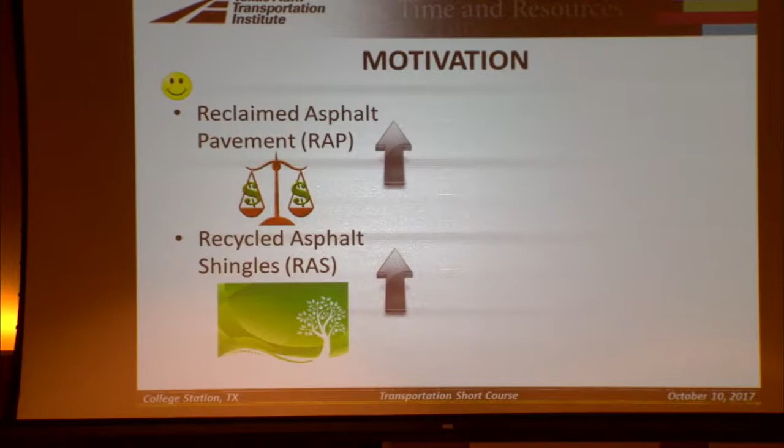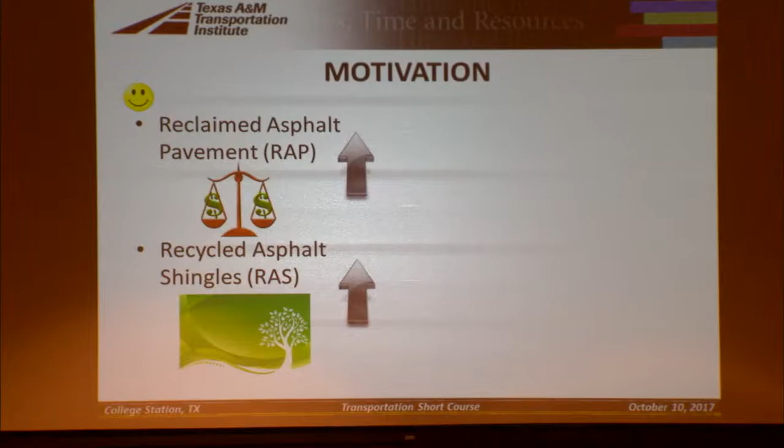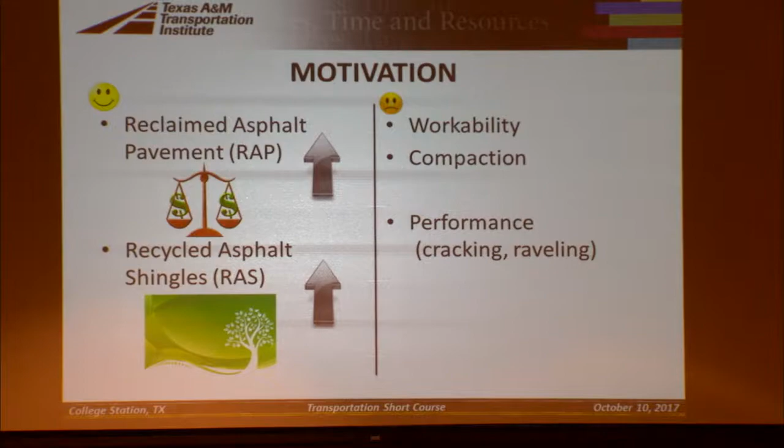This topic is timely because a lot of agencies are pushing to increase the amount of reclaimed asphalt pavement, or RAP, and recycled asphalt shingles, or RAS, in mixtures. That's good for economic reasons, since contractors save money by not needing as much virgin binder, and for environmental reasons, since you don't need to mine as much raw material.

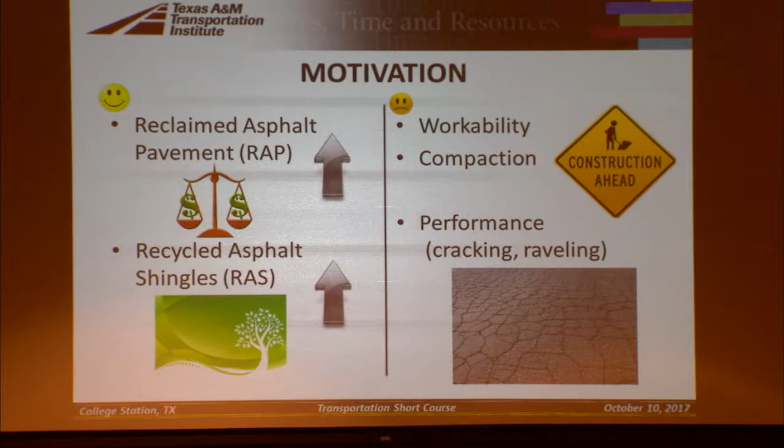However, there are still concerns with using high amounts of recycled asphalt pavement or shingles in mixtures, because sometimes there are problems during construction in terms of workability and compaction. Also, there's a general concern that these mixtures using aged materials will be more prone to cracking or other issues such as raveling.

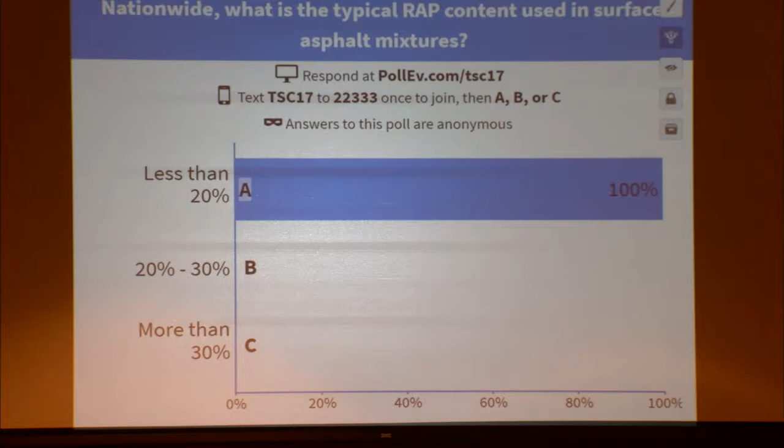So let's start with a poll - grab your phones or tablets to go online. We conducted a survey a few years ago sent to all DOTs, and got about 45 of the 50 states responding. What do you think the typical RAP content is that they use in surface asphalt mixtures? The options are less than 20%, 20 to 30%, or more than 30%.

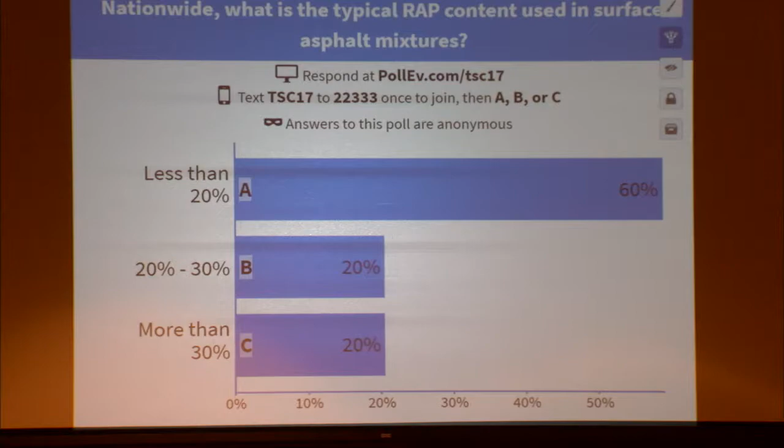I'll give you half a minute to submit your responses. Again, this is nationwide, not just Texas. Okay, it looks like about 60% of you said less than 20%, and that is correct. A lot of the DOTs are using about 15% at most in their mixtures.

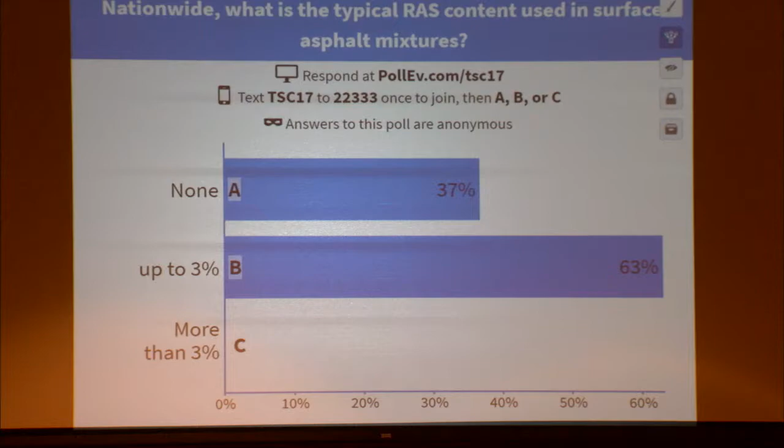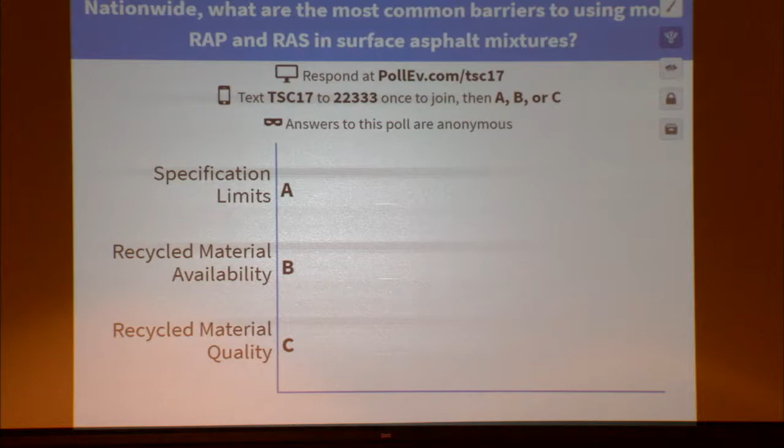Last question, based on this same survey of all DOTs: what are the most common barriers to using more RAP and RAS in surface asphalt mixtures? What do you think they said? Is it because of specification limits, the availability of the recycled material, or the quality of the recycled material?

It seems most of you think it's the quality, but based on the responses, it's actually their specifications that limit them from using RAS. The materials are usually available, and as far as their answers went, they were not concerned about quality, but their specifications would limit the use of RAS.

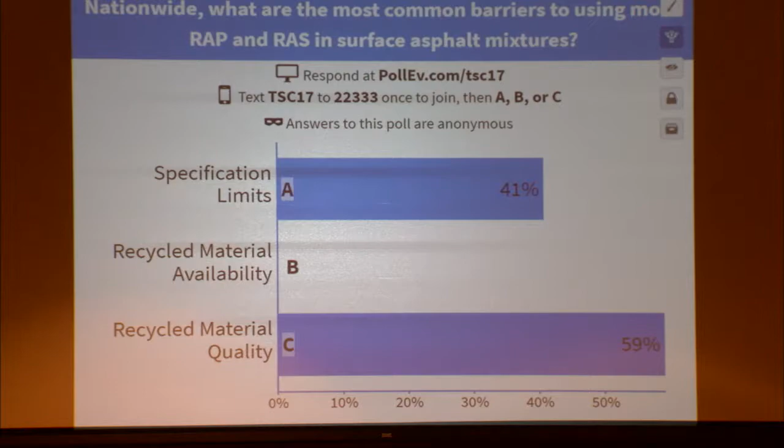So before we keep talking about recycling agents, let's review how we express RAP and RAS content. Traditionally, it is expressed in terms of percent of the total mix - for example, we say 10% RAP, 5% RAS. People tend to use this terminology.

However, recently a new term has been introduced called the recycled binder ratio, or RBR. Opposite to the traditional way, this is expressed in a decimal fashion. Looking at this equation, you have your RAP component, the RAP-BR, and your RAS component, the RAS-BR. This is calculated by taking the percent of binder in the RAP times the RAP content - that's your numerator, how much RAP you're putting in and how much binder the RAP has - divided by the total binder content. The same calculation applies for the RAS.

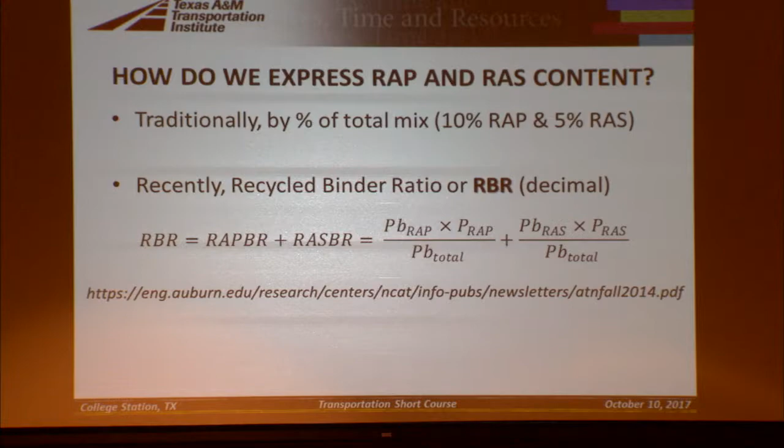It turns out that if you look at TxDOT specifications, this table is in items 340, 341, 344. You're actually also using recycled binder ratio. So in this table, you have your original specified binder, and the allowable substitute PG binder, which you will note has a lower, either high or low PG grade. You also have different limits for surface mixtures, intermediate mixtures, or base mixtures.

The little bit confusing part, at least from my point of view, is that you're still expressing these numbers in percentage instead of the decimal as is done by other institutions. So somebody can look at this and still think, oh, this is 20% RAP, which if you're only using RAP may be okay or close. But if you look at the bottom of the table, this is the combined recycled binder from RAP and RAS. So if you're using both materials, you can't think of these straightly as a percentage.

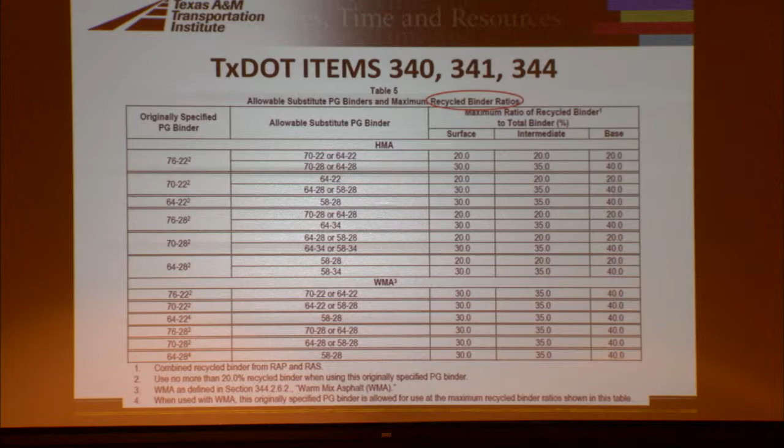So what are the advantages of moving away from percentages to the RBR? Well, for one thing, you're separating the RAP and the RAS, which is beneficial to do, and you're doing a weighted average of those two components. One of the downsides is that it sort of assumes 100% blending. I will talk more about this blending issue later, and you will see how and why that is important.

So on the right side of your screen, you'll see a proposed notation, and this is by NCAT. It has not been used as far as I know from any DOT, but what they're proposing is that you use both the percentage and the RBR together. So you will have an A, B, D, and E value, which will show the percentage and the RBR. It's something they're proposing. It may be useful, so it clarifies the issue.

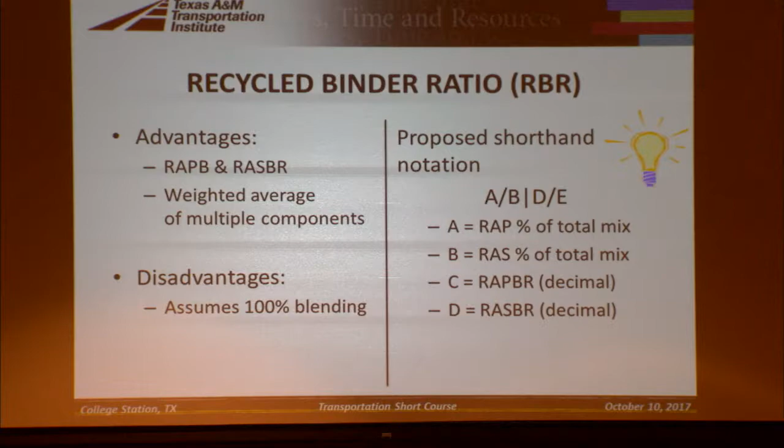So going back to the topic of recycling agents, we said they're beneficial. Not a lot of agencies are using high quantities, so how can we incorporate more RAP and RAS in surface mixtures? Well, as I showed in a previous table from the TxDOT specifications, you can lower your binder PG. That's a way to do it.

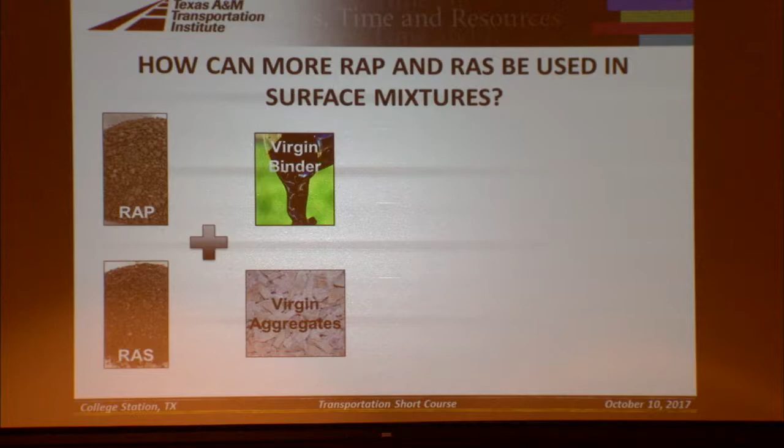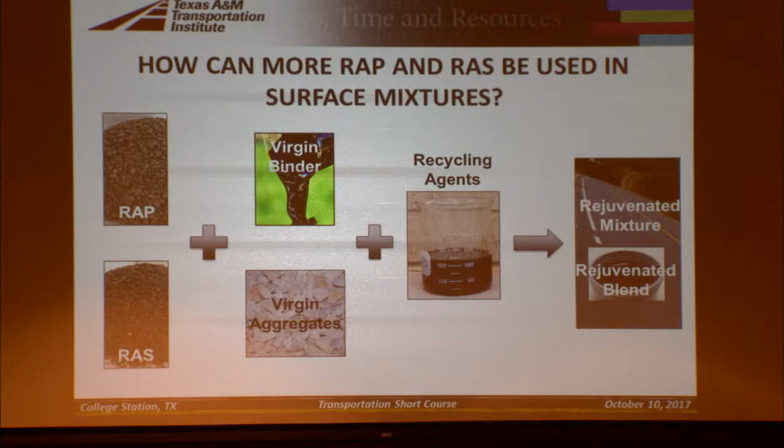Other agencies lower the air void content. So instead of having 4 or 5%, they go to 2 or 3, so they increase the amount of virgin binder. Another way to do it is by adding these recycling agents. So you have your RAP, your RAS, your virgin binder, the virgin aggregates, and then you add this extra component to the mixture to be able to introduce more of those materials.

So what are recycling agents? Well, these are just chemical products. Think of it as kind of like a warm mix additive. It's, in a general sense, just another additive you can put in your mix.

So what do they do in the mixture? They reduce the mixture stiffness. So that asphaltene to maltene ratio, like the stiff part to the volatile part, they try to put that into balance again. And they improve the low temperature and high temperature PG. All that translates into what's important to achieve, which is better cracking resistance. As I mentioned, these materials are heavily aged, so they will tend to crack easier. And some suppliers claim there are other benefits, such as improved workability and compaction.

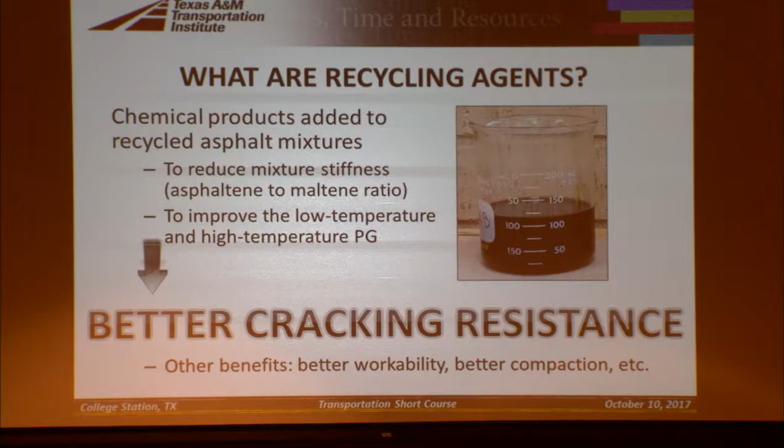What types of recycling agents are available? I took this table from Asphalt Pavement magazine. It was published back in 2015 by NCAT. They have 5 categories of recycling agents, from paraffinic oils, aromatic extracts, etc. However, even though it's been just a couple of years since this was published in 2015, we think there's a lot more products out in the market now, to where this table is a little bit outdated.

Right now, there's a lot of bio oils out in the market, and there's modified, reacted, stabilized vegetable oils that don't fit neatly into any of these categories.

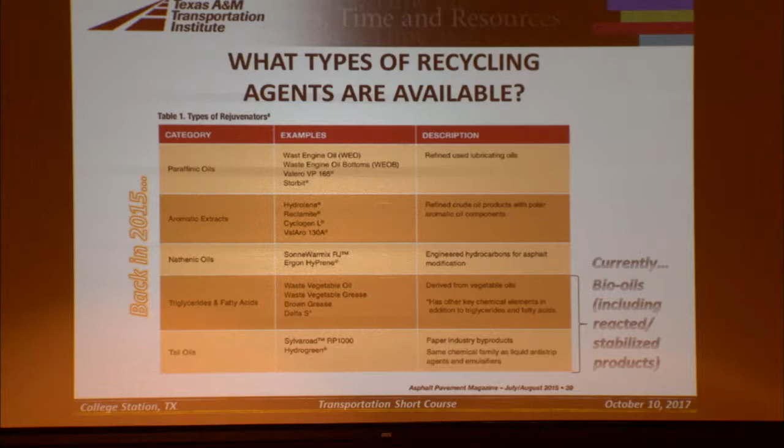So the next logical question is, how do I select a recycling agent? This is sort of like the million-dollar question, because there's no easy answer yet. Here at TTI, we have done some research.

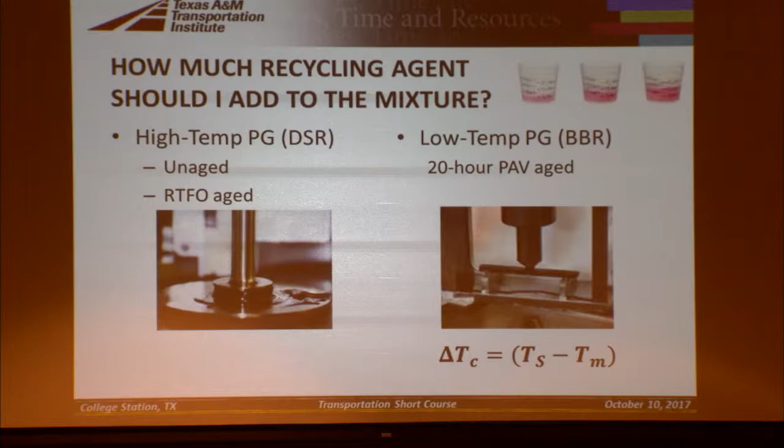From the BBR results, we can get something called the delta Tc, shown at the bottom. It's a simple calculation: the temperature at which the binder or blend meets the criteria for the S and M value, we just subtract those two. So we have developed a method for this recycling dosage selection.

I'm going to show you 2 ways of doing this. I'm calling this the detailed method because it involves more testing, and then I'll show you a quick method - how can you estimate this dosage without doing all the binder testing?

For this detailed method, you will need to prepare blends. What I'm calling a blend is that you take your virgin binder, extract and recover the binder from the RAP or RAS, and then blend that with the recycling agent. So you'll have a blend with no recycling agent, and then 2 other blends - one with a low dosage, say 2 or 5%, and another with a high dosage, say 10%. Then you will plot the results.

Here I'm showing a graph with the high temperature PG grade on the y-axis and the dosage of the recycling agent on the x-axis. In this particular example, we're doing 0%, like no recycling agent, then 2% and 10%. We're showing 2 lines, one for the original blend and one after RTFO.

This particular example is a 0.28 RBR blend with a PG64-22 virgin binder, 0.1 RBR of Texas RAP, 0.18 RBR of manufacturer waste asphalt shingles, and the type of recycling agent, which is a tall oil.

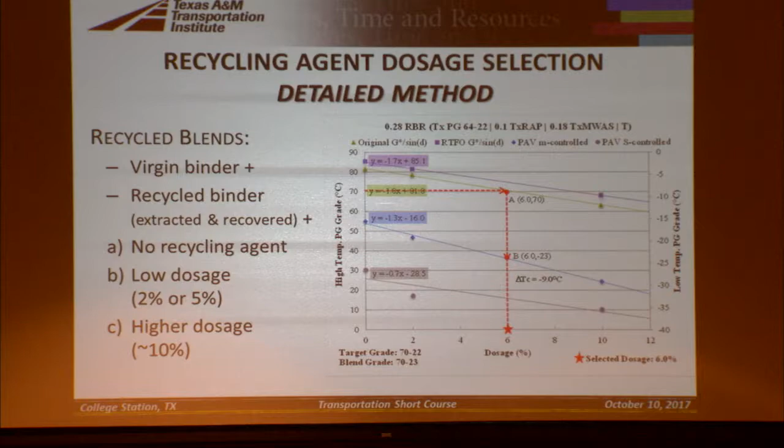So it gives me a blend grade of 70 minus 23 with a 6% recycling agent. So as you can tell, here we still need to prepare blends, do testing, low and high temperature PG grading. So is there a way we can circumvent some of this testing and have a quick estimate instead of doing all that work in the lab?

So this is what I'm calling the quick method for estimating the recycling agent dosage. In this particular case, you will only need the virgin binder and the extracted and recovered recycled binder. You will not need to make any blends, and you will only need to test on high temperature PG and unaged. You will not need to do any aging. So as you can tell, comparatively, it will be much easier.

I'm showing here an example. There are two blends using a PG 58-28 with RAP only. So a low percent of RAP, 0.3 RBR and 0.5 RBR. And these are their respective values here. The square is a 0.3. The circle is a 0.5.

On the left axis, I have the virgin PG. On the right axis, I have the RAP PG. So I'm just assuming a linear relationship there, linear correspondence. And this is sort of, if I were to make a blend with this RAP, I will get a 67.7 PG grade. So with that value, which is what I'm calling here the PG high of the blend, I can estimate the recycling agent dosage.

How do I do that? Well, once I have that value, I can subtract the target PG. Remember in the previous example it was a 70? And I can divide that by something that I'm calling slope rate.

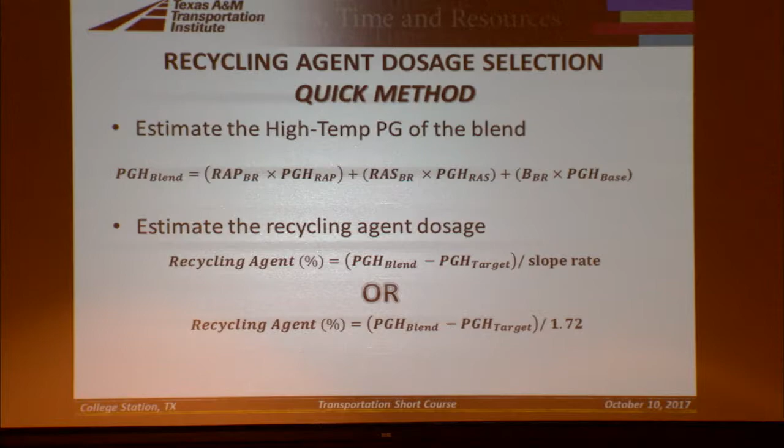Now, once you decide, okay, it's reasonable, then you can do the detailed method and get a more accurate number.

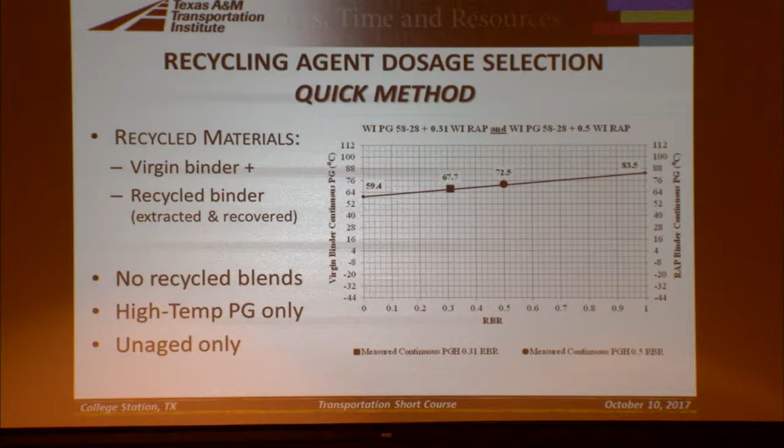Previously, I mentioned blending. Even in this method that I show here, on this linear relationship, we're assuming 100% blending of the virgin and recycled materials. But in reality, we're not getting all the binder from the recycled materials out. It's not blending totally with the virgin materials.

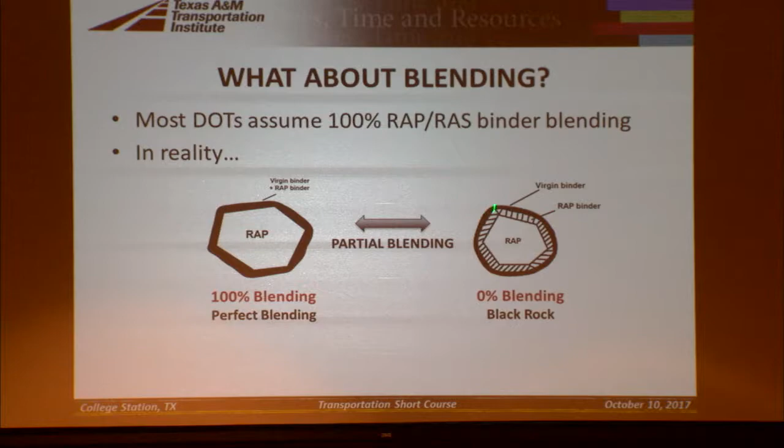So how much is blending? If we assume everything like it's currently done on most mix designs, when you estimate the amount of binder on your RAP or your RAS, you count it all in. So you're assuming all of it is going to participate in the mix. But in reality, it's something in between that and getting none. So this will be the case where your RAP and your virgin don't mix at all. It's a 0% blending, just like a black rock.

So what factors affect blending? Aging, of course. The level of aging in your recycled materials will affect your degree of blending.

This is an example. We generated artificial RAP in the lab, aging the mixture for different periods of time. RAP 1 was less aged, RAP 2 more, RAP 3 more, and RAP 4 was very, very aged. We artificially created those materials and estimated how much of that binder was blending into the virgin mix. As you can see, with aging, the degree of blending goes down significantly.

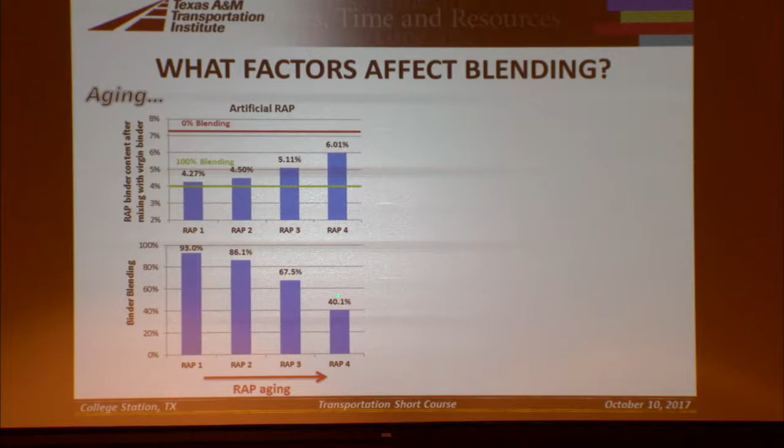What about for real RAP? We had a Texas RAP where we measured the high temperature PG, about 108. We had a RAP from New Hampshire with a high temperature PG of about 90. Just because of the difference in aging, we could tell there was a difference in the degree of blending: about 40% for the Texas, about 73% for the New Hampshire.

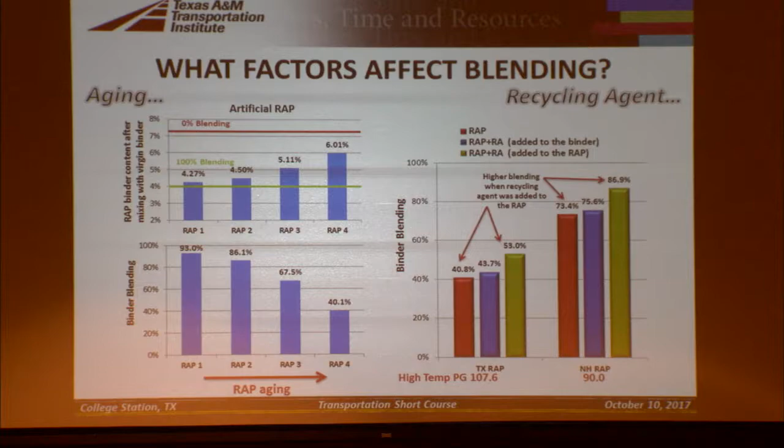So just how much aging you have in your recycled materials will determine how much of that binder comes in. Now this was an interesting experiment: we were adding the recycling agent directly to the RAP and then to the binder. When we added it to the binder, we saw a marginal increase in the degree of blending, but when we added it directly to the RAP, the increase in the degree of blending was much higher. So we think these are important variables to look into — not only how aged are your materials, but how you are adding your recycling agent to the mixture.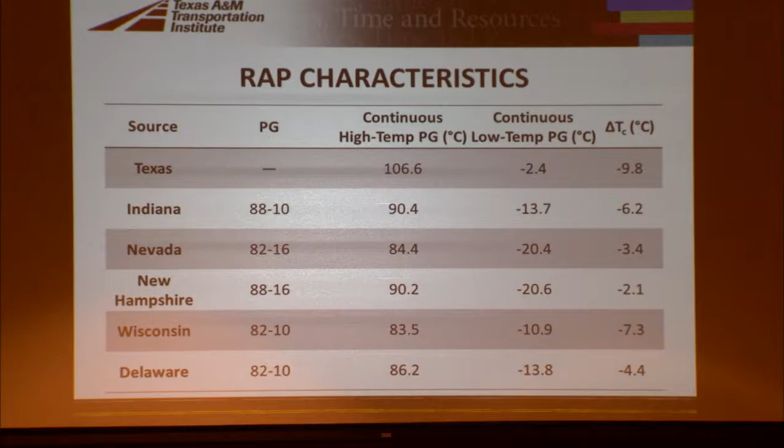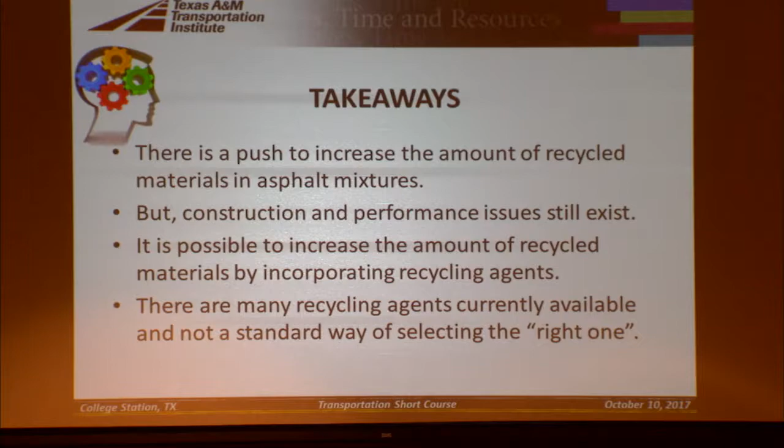So these are just a summary, some of the takeaways: there's a push to increase the amount of recycled materials in asphalt mixtures, but there are some construction and performance issues. We think we can achieve that by using recycling agents in mixtures, and there may be a way of finding the right one, but it's still a work in progress. There's a way of estimating the recycling agent dosage with minimal testing, just to give a rough estimate. Also important is the blending between the recycled materials and the virgin materials — partial blending occurs, and that degree of blending depends on the aging and how you add that recycling agent.

So this is my summary of the presentation.

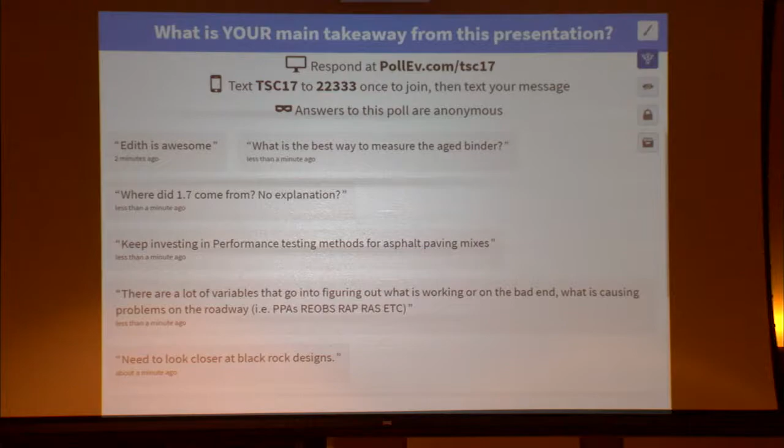If you have further questions, I can get together with whoever asked about that 1.7 — where did that come from? I can talk to you after the session and go over that. I just didn't have time, but if you have questions, I can answer them now.

You're asking about mixture tests? We are doing some mixture performance tests as well on these blends. We're doing the semicircular bending test, SCB, and the BBR sliver, which is sort of like a BBR test but with mixture. And if we feel the recycling agent dosage goes too high, we also run the Hamburg to verify there's no rutting — sorry, in the concept of the balanced mix design.